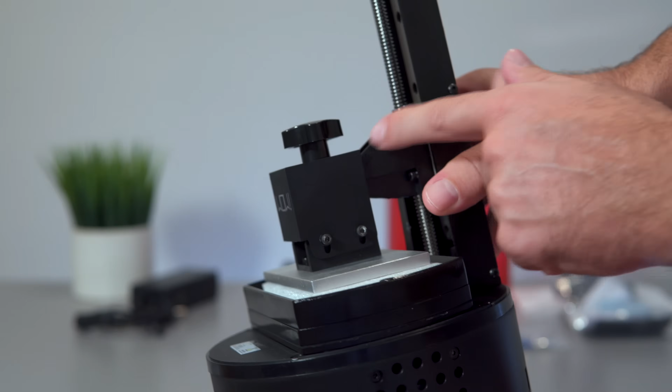So this is our printing bed here, and our Z-axis travels on a linear rail, and this is our Z-rod. All these parts here, though, are plastic, so for something this small, I don't think that really matters too much. And it looks like it says 'wow' on here with an exclamation mark.

So this is the back, with a sticker with some more information. This is where our power cord will plug in. There's a fan behind these little holes for ventilation, and another one on the other side. Here we have the knob that does all the functions, and the full-size SD card slot underneath that. This is what the bottom looks like.

Alright, so the interesting part about this printer is that it does not have an LCD screen, so there's no way to see or navigate any menus. It does have this knob here that pushes and also rotates, so maybe that has some kind of function. We're definitely going to want to go over the manual and figure out how to get this thing set up.

But I'm wondering if I unscrew this part, I should be able to slide out the printing platform, and there it goes. This is a solid aluminum piece here, and we had a little foam here protecting the bottom, which is the tub that holds the resin in. And all this is metal, by the way, guys.

And it looks like you can unscrew the tub and remove it and clean it and whatever else you got to do. I don't know if you guys can see, but it does say 3M right there. Alright, so now we just got to figure out how to get this thing started.

Looking at this resin, it seems to be a different kind of formula because it is water washable. This resin is actually water soluble, so you don't have to use alcohol at all, which eliminates a lot of the smells and stuff. That's quite interesting, definitely excited to try that out.

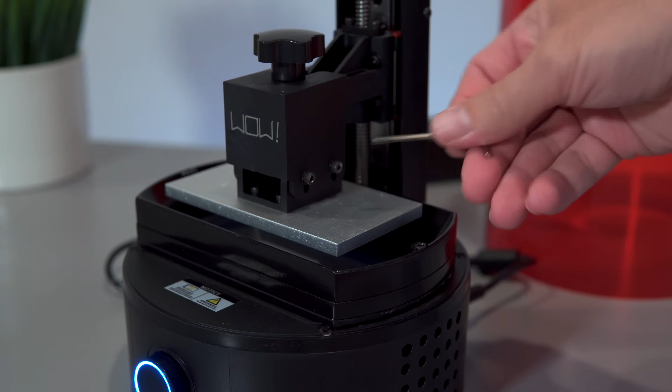The first thing you want to do is adjust this bed to be flat to the bottom here where the screen is. So we're going to put the build plate back onto the frame and tighten it up nice and tight. On each side there are 4 bolts that we need to loosen, which releases the bottom plate so it can move around. As you can see, the bottom plate can fluctuate quite a bit up and down. The whole point of this is to get it really flat to the bottom.

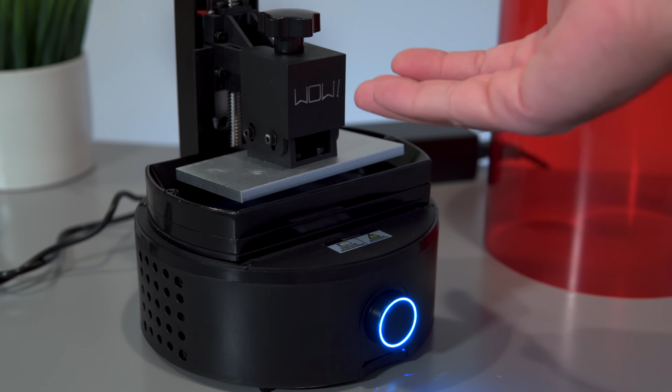The way you move the Z-axis up and down is you just rotate this knob. If you rotate it one way, it goes up, and the other way, it goes down. So now we're just going to slowly move down. All right, so we are on the bottom now, if you guys can see that. Make sure you do go all the way down.

To get this thing really flat, what you're going to do is put 2 fingers like this, apply some pressure down, and as you're holding it down, you tighten these little hex bolts back up. That's going to give us a really flat, even surface on the bottom. So be gentle when you tighten everything up, it doesn't have to be crazy tight.

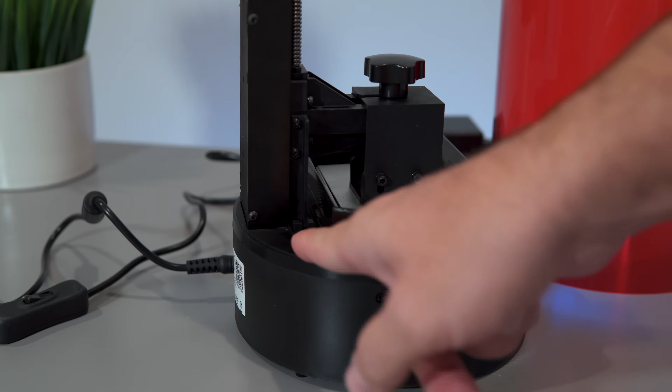If you guys notice, we can't go down anymore because it does have a sensor - kind of hard to see, but right here there's like a little optical style sensor that tells it to stop, and that's right at the bottom where it needs to be. Simple as that, we have our bed leveled now, or should I say our printing surface.

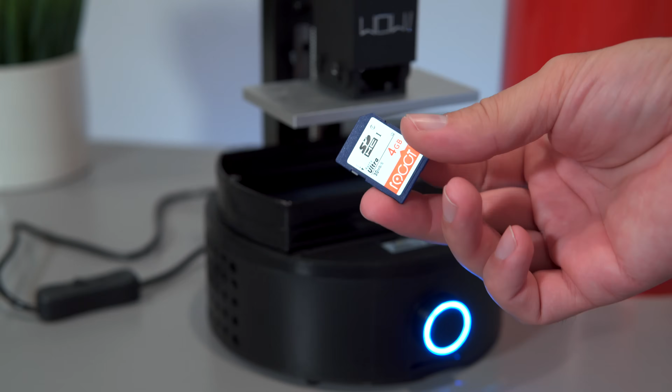So let's go ahead and go up. Now I did throw the SD card in the computer, and I think there's some test files in there that we can go ahead and print. Let's go ahead and give it a shot. That just goes on the very bottom here, upside down, and it clicks in. Our light actually turned off and turned green. I'm not sure what all these lightings mean, but I'm guessing green means maybe it's ready to go.

So let's go ahead and pour some resin in there. Now you definitely want to wear gloves when you're handling resin, and you want to make sure you have enough ventilation in the room so you don't choke yourself with these kind of chemicals. But this being water-based, I think it's not as dangerous as other ones. Let's go ahead and pour some in - we're going to pour about half of this tub in there. Look at that, we got this orangey tan color.

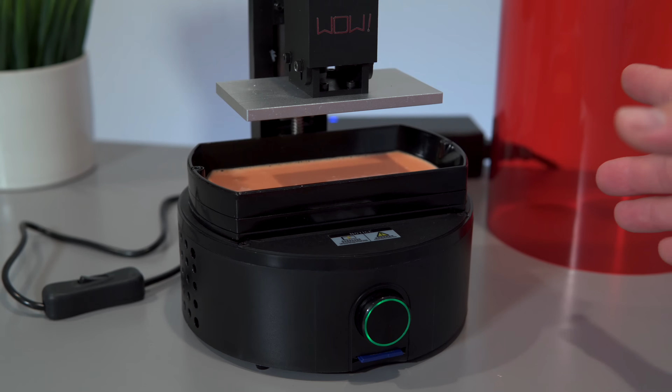There should be plenty. I haven't looked at the manual at all on how to use it, but I'm going with my intuition that if we just click this big button here, it should start. Let's try it - all right, so something started, and it's lowering down, so maybe we got something going here, guys. I can hear there's quite a decent amount of fan noise coming out of here. Let me see if I can get the microphone closer.

It's not super loud, it's just definitely noticeable. All right, so it's going into the resin now.

Oh, look at that. I hope we didn't put too much. All right, and it looks like our process has started. Or maybe not, it's coming back up. All right, so it's going back down now.

So it's going up and down some more, so I'm guessing it's doing something, and I was looking at the manual and the pulsing red means it is working. So I guess it did find a file and it is making something right now.

So I'm going to leave it alone for now, and we'll see if something comes out of it. But we got to put this cap on because we don't want UV light to mess with our resin in there.

All right, so I'm just gonna let it be, and we'll see what happens in a little while, and we'll see if something starts to show up in there.

All right, guys, so maybe you can see there we have some kind of model popping up. So it's been, I don't know how long, maybe about an hour, and it's working, and it's definitely making something. So yeah, it looks like everything's working out, and we'll see what this thing looks like when it's done.

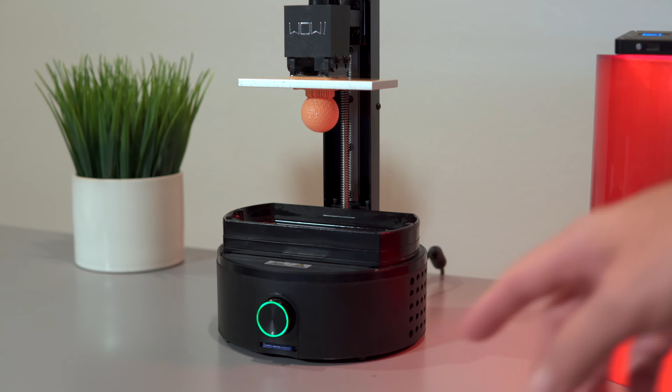So the print finished, and it looks like it is successful. So let's go ahead and take the cover off. And we can also see that we got the green light here pulsating, indicating that the printer is done. So I'm gonna go ahead and turn it off.

And let's go ahead and look at what we have here. So I'm gonna have to be really careful because there's a bunch of resin on the top of this build plate. So I'm just gonna go under and tilt it so we can drain some of it.

And so the cool thing about this resin is we should be able to wash it off in water instead of alcohol, which makes it really friendly. So our print looks like some kind of ball, and it is on supports.

So I went ahead and got a little container of water ready, and I'm just gonna set this whole thing in there. And theoretically this should just clean right off, and it is coming off actually quite easily because we can see all the little holes in the ball are starting to open up.

Wow, that's pretty awesome, and that works very well. Now I don't think we need to keep it in the water too much, but I don't think it matters either since the cured resin shouldn't dissolve technically.

All right, so we're gonna grab our provided spatula here and see if we can scrape this print off. Hopefully it'll come off easy. Okay, it's stuck on there quite well, but it does seem like it's coming.

Okay, so I just broke part of it. Okay, so it's coming off quite easy, but it's coming off in pieces. It's better that it sticks than it doesn't, so.

All right, well, this should not be harmful at all to the touch now because we're only touching cured resin. And you guys can see how the supports were laid here, and they're popping off really easy also. I think I am damaging the ball a little bit. Well, actually, maybe not. So that's what the support looks like.

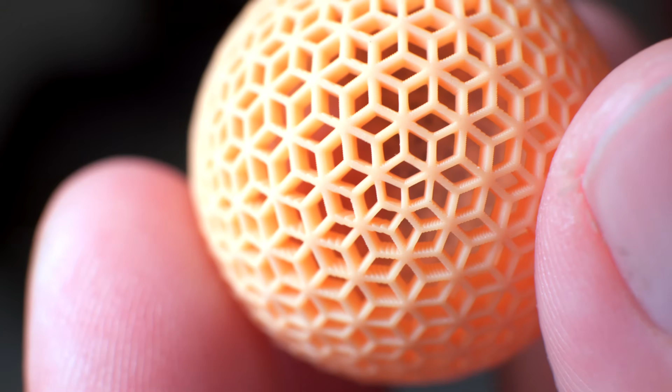Check out that printing, I mean that is phenomenal. You can kind of see how big my fingernail is for scale. I don't really know what to say except I'm impressed. You can see the layer lines right there, but with your naked eye you can't really see them, you really have to look for them. So hopefully this gives a better perspective of how good this print is. Even though this printer is on the budget side, we're still getting amazing print out of it.

So yeah guys, quite exciting stuff. I'm definitely excited what this printer can do now. I'm going to go ahead and wash all this stuff up, and it looks like it's pretty much already cleaned up, I just need to wipe it down.

I think the next thing we should do is grab this SD card, go to our computer, and install the software that comes with it so we can slice our own models and print them. Since I'm not going to use the printer for a little bit here, I don't want this resin just sitting in there, so I want to pour it back into the container.

Now you can pour this straight from the machine, but that would not be ideal because it'd be hard to clean up the whole tub area. So what you're going to do is unscrew these two bolts here.

Honestly, I wish they would have made some kind of quick knobs we can unscrew. I don't know why there's no knob, because either way this thing's going to have to come out. So then we're just going to grab our filter that was provided, and we're going to grab the whole tub, and we'll be able to pour the resin back into the container. You want to use a filter in case there's some kind of contamination, so it doesn't go back into the pure resin and mess up your print later on.

Maybe you can see what it looks like, there's just a clear plastic that the light shines through, and that's how it cures the resin. So when I get this pretty much all out, I'm just going to go to the sink and wash it off, since it washes off by water, and we'll be done.

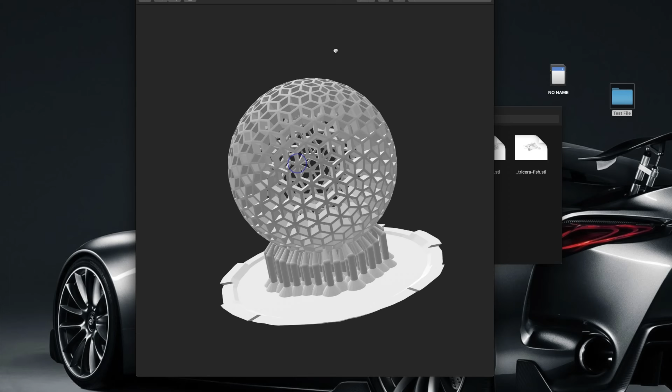We're going to print some of these here, kind of like this ring. That's pretty cool, we can try that. So back to the software, you can install Chitubox from here, or you can just go online and install it. It's up to you.

Here's the cool thing about Chitubox: they already have settings just for the Spark Maker. If you go over here by this big slice button, you can see settings. If you click on that, I have the Spark Maker FHD selected, and it automatically puts in all the parameters. You will need to go over here in the print area and fill these out correctly according to the PDF we saw in the print parameters of our resin. Depending on the kind of resin you're using, I filled this out on the 0.05 millimeter layer height. That's the only thing you really have to do, is kind of fine tune the resin to the slicer so it knows the best way to print.

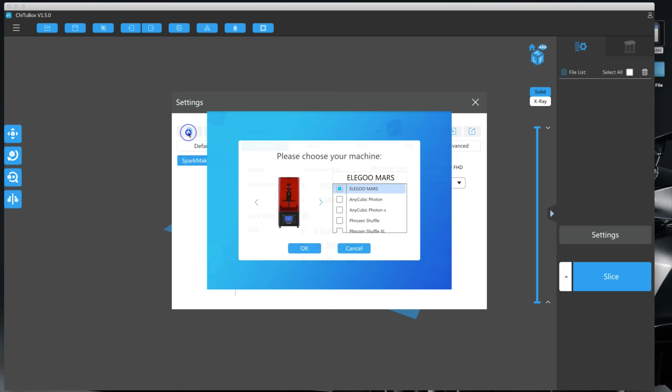The way you're going to find the Spark Makers is you click on this little add new printer button, and here it has all kinds of different printers you can choose from, and the Spark Maker right here is one of them. You do have FHD, or I guess the original. I think most of the Spark Makers now are FHD, which is the higher resolution.

If we click on that, our little picture comes up here. I'm going to cancel it since I already have one, and it'll just show up here on the side, or you have a default here. If I go to default, it goes to what it starts with, but if I go to my profile, it goes to the Spark Maker. So yeah, it's as simple as that.

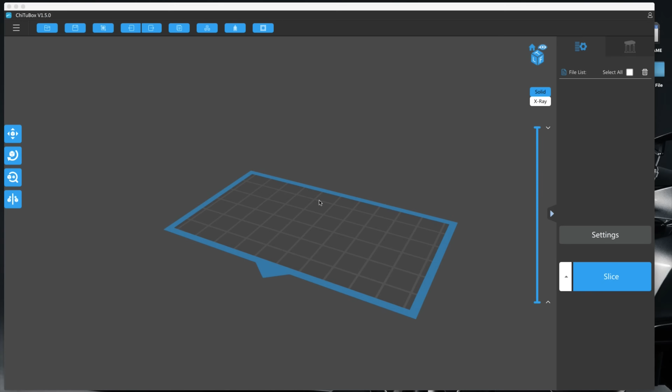After that, we're just going to drag in any model you want. The models they've provided are nice, easy and ready to go, but let's try to print something of our own, like this calibration cube. We're just going to drag the file in there, and it pops right up. Obviously you can move around, zoom in, zoom out, do what you got to do.

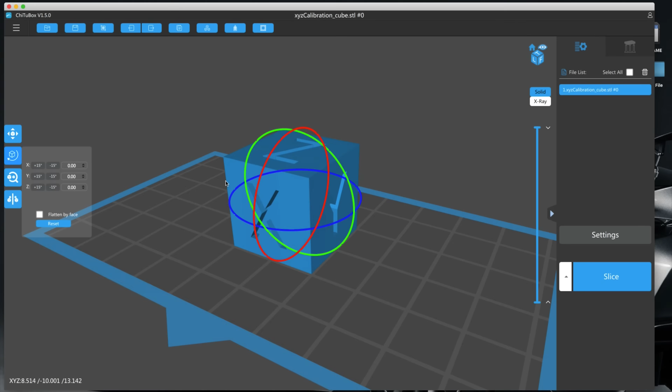Here's all your settings. This moves it on the axes. This twists it around if you want to twist it around. This is to scale it, bigger or smaller. And then here you can kind of mirror it and whatnot else. Pretty basic controls. On the top we got open file, save a file, apparently you can screen capture or record, undo, redo. You can clone the model, auto layout the model or models.

You can make the model hollow, which we definitely want to do, because if we print this solid, it's going to be quite a lot of resin. Then we can make a little hole for the resin to drain from. So if we go over here to the upper right portion.

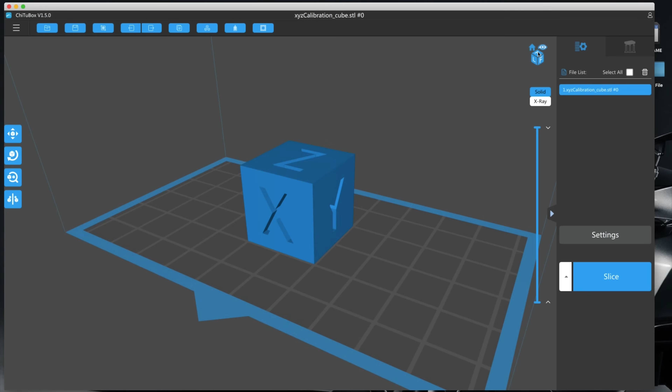Here we can see on the axes cubes are what we're looking at. So you have a home button here and it kind of just zooms out. Here we have a little, I guess, zoom button. And here we have top, left, and front. And there's an arrow here indicating which way's front.

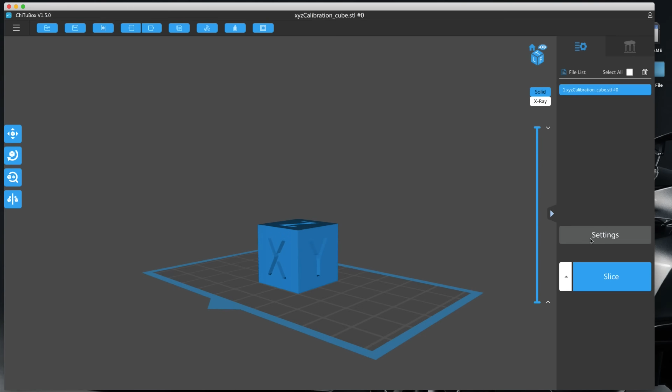So over here we have settings. So this is the file that we're using right now, which is this cube. We can click this delete here and it'll delete the cube. So we saw the settings and this is the slicer when we're ready to slice, which we're not yet.

So over here we have a tab, and here we have all the support settings for the model. Now I'm not too good at this, but usually automatic works for me. Here's all the settings you can set for top, middle, bottom, and raft. So I'm just gonna leave those where they are.

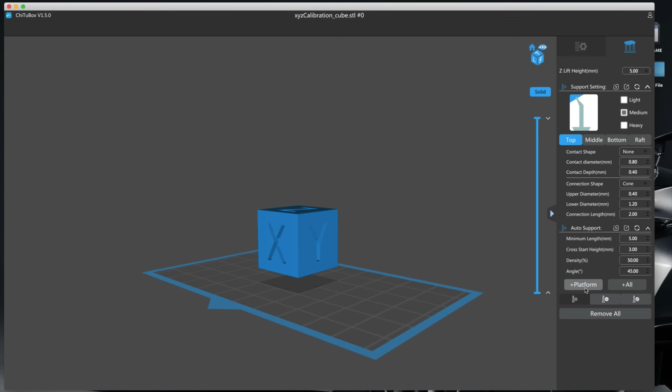And then we're gonna choose medium for the support type, which I think is default. So here you can kind of adjust everything if you play with it. So down here, if we click this button here, platform, we can see the supports automatically just appear and there's a little platform there. So in simple terms, that's pretty much how you do it. But if you play around with this, it's pretty intuitive and it makes sense.

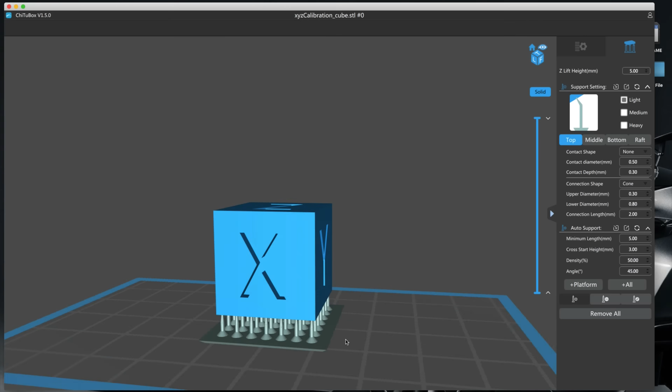So let's go ahead and remove all the supports and then try light. And if we try light and do it again, we can see we get a lot more pieces, just smaller ones, connecting to the cube. So I'm not sure if this is better or not. I'm just gonna go ahead and stick with the medium. I'll remove them, put in the medium. And obviously you can play with all this in the settings here.

Now we have a little scroll here. If we scroll it, we can see exactly what's going on. So right now our cube is completely solid and we need to fix that problem.

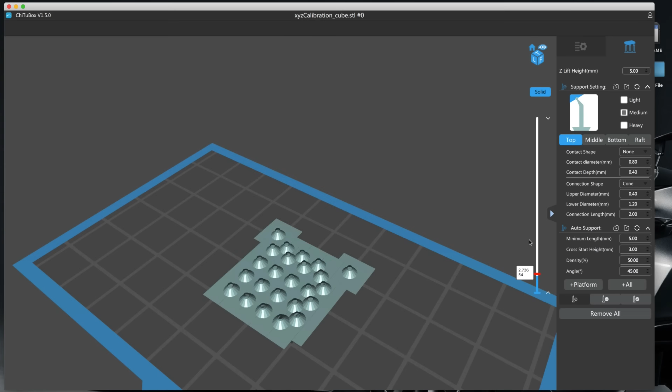So what we're gonna do is go back to this little gear thing here, and then go over here and click on hollow, and it's going to ask us the wall thickness, inner and outer. I'll push start and there it goes, it hollowed it out. So as you can see guys, it's completely hollow inside and there's only supports on the bottom.

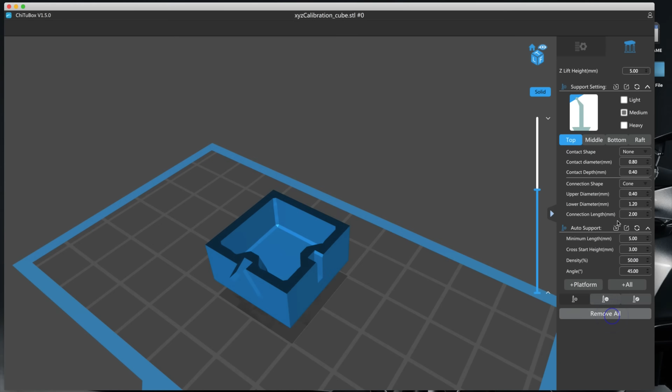Now if we go back to our supports, we can remove all the supports, and then if we click on platform again, you can see how we all of a sudden have supports inside of it. So you probably want to hollow it out first and then do the supports, because now we have little trees inside for the support of the top layer.

Now we also have another issue. If we're going to print like this, potentially we could have resin inside the cube, and that's not a good thing because it's not going to cure, plus it's going to warp the cube.

And so since our top here is actually the bottom, what we want to do is use this option called dig a hole, basically. It's going to make a hole and it's actually going to keep the little cap if you select this part. And you can choose the kind of hole you want. So let's just go with what it has here.

And so here we can add a hole anywhere on the cube, put a hole right here. So what it does is makes a hole and it throws the extra piece down here on the bed. So it's actually going to print that extra piece, so later you can cover it up. And so there you go.

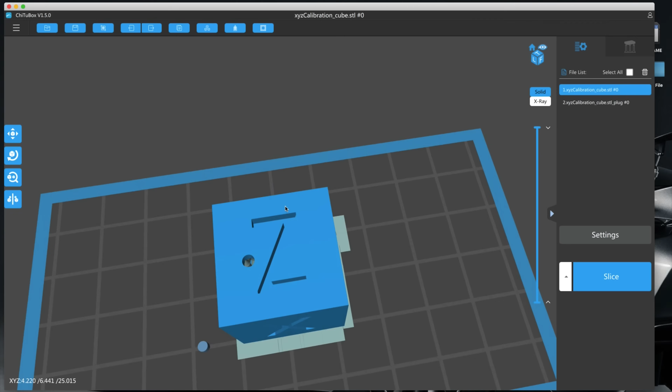So now we have our hole. And so now when this thing prints, if there's any resin inside, hopefully it'll leak out. And then we can just take this little plug and plug it back in. So I guess we'll experiment with this idea here. Because this is a box and it's completely sealed and we have air inside, there's a good possibility there'll be resin in there that might want to come out.

All right, so once you're happy with everything, what you're going to do is come over here and click on slice. And so now it's going to get sliced.

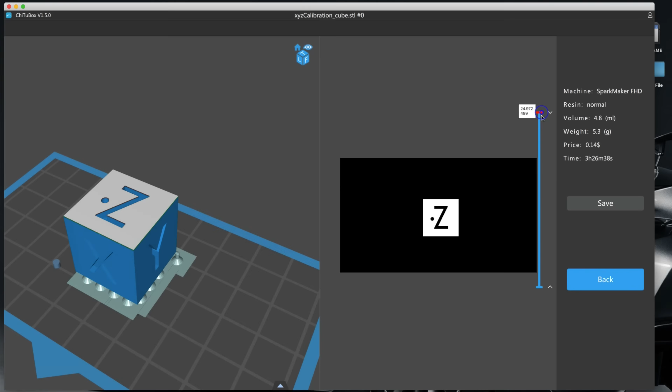And here we have a little preview, showing exactly how it's going to print. So if we go to the very bottom, this is what it's starting with. You can kind of see how it's going to be printing, so you can double check everything and make sure it looks good.

Over here we have some information about the volume, the weight, and the price, and how long it's going to take, most importantly, which is 3 hours and 26 minutes. That's quite long, but don't forget we are printing at quite a fine resolution.

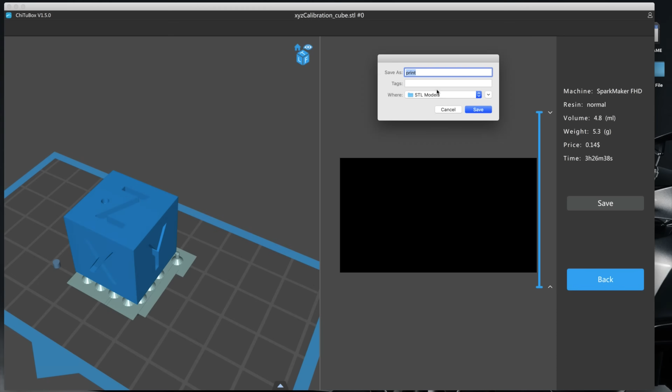So what we need to do after that is save the file. Because our printer only takes one file at a time, I'm not sure exactly what they need to be called, but I think if you just leave them called print like this, it'll work every time. Once you stick the SD card back into the printer, it'll know what it's looking at.

So let's go to desktop here and save it. Now it's going to write the file here. Okay, it says wrote successfully. Let's minimize this. This is the file that we have here, and it's called print.fhd.

So now all we got to do is throw this onto our SD card, and now we can go print it. Now if you have more than one file in here, you might want to make another folder and throw the files in there or delete them. I'm not sure exactly how the printer works with multiple files, I haven't really tried that, but if you just have the one file that you can see up front, then it always picks that and prints it. So now we're ready to print.

I'm just going to put this in the printer and we'll start printing our cube.

Alright guys, so we're back at the SparkMaker, and let's go ahead and put the SD card in. You can have the printer on while removing and installing the SD card. This will change because it'll read it and it turns to green. It's found files and it's ready to print.

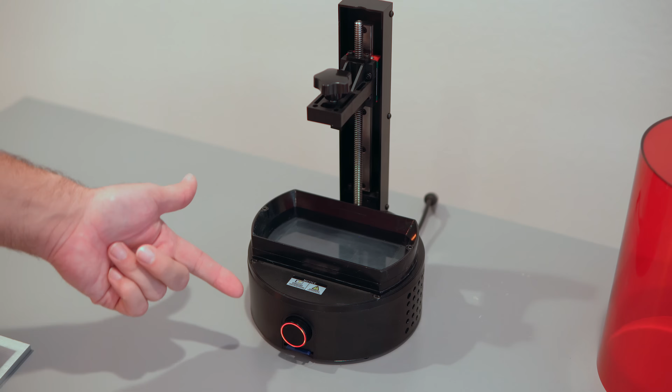So if I click on it once, it should find that file and turn red here. And now that it found it, it started printing. And that's pulsating - our Z-axis is going down right now.

Let's say you started your print and this thing is so low in there you can't even see. But if you pause it by clicking it once, it'll raise it up above the tub usually, I think. And then you can see if your model's stuck or not to the plate.

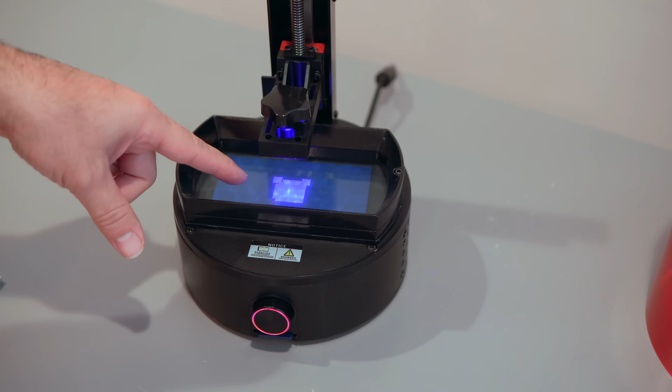Alright, so as you guys hopefully can see, our print has started. We can see our first layer of our cube, which is the platform part of it. So if I click this knob one time, it's going to pause and bring it up. Let's go ahead and do that.

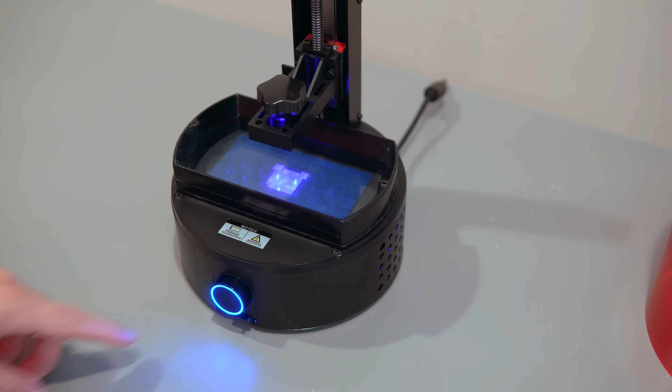And you can see it turned blue. Now it's going to finish the layer before it goes up. So if it's in the middle of doing something, you got to wait for it. Alright, so it's finished with this first layer.

Now it's going to go up quite high, and we'll see on the first layer if this will be higher than the bath here, so you can see it or not. Alright, and so it stopped right there. And if we put our plate in - you guys can't see, but it's about 5 millimeters above the tub, so you can see the bottom of the plate.

So that would be one of the ways that you can check your print while it's printing, if you wanted to make sure it's stuck to the bed plate here. So to resume the print, all you got to do now is push the button again, just like that, and it's going to go back down and start printing.

So now it's going to work on its second layer. Wherever it left off is where it's going to go. But let's say you wanted to completely stop the print. What you would do then is hold the button for 3 seconds or more, maybe, I'm not sure, about 3. There we go.

And it turns green. So if you remember last time it turned blue, that was paused. Green means it's going back to the state where it's on standby, ready to print. When you stop your print, it actually doesn't go anywhere, because from now you can move it yourself.

And so those are some of the basic functions that this knob has. So since we're ready to print, I'm going to go ahead and put some resin in there.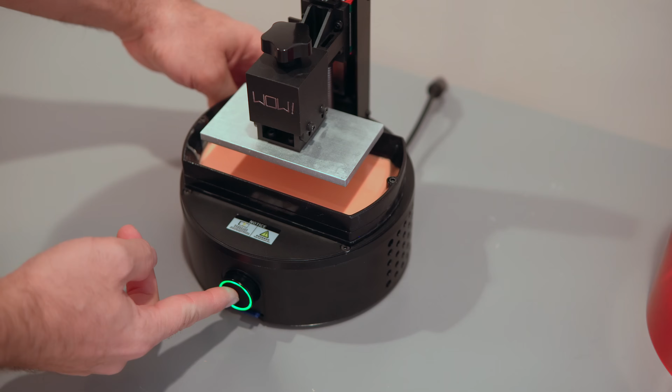And we'll start the print by pushing the knob here just once, and it initiates it. Alright, so in about 3 hours this print will be done, and we'll check it out.

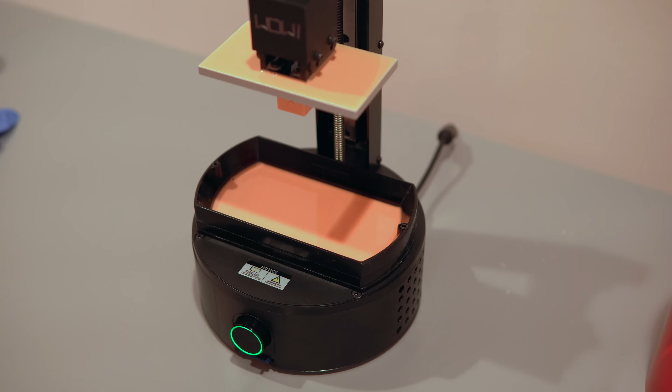So the cube is done. Let's see what it turned out like. Now I'm going to go ahead and put in a glove before too many people get upset at me.

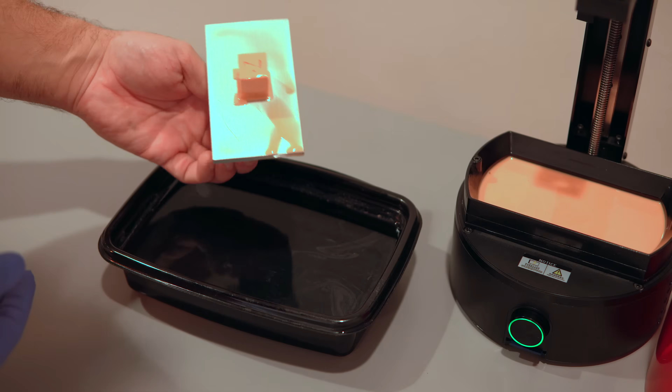So we're going to drain this by angling it. And I do have a bath of water here ready. We can see our cube is on there, but unfortunately, I don't think we got our little plug printed. I guess that got lost or didn't stick to the plate.

So let's go ahead and dunk it in there and clean it up. Just going to whirl it in there. This water-based resin is really friendly. Alright, so now I'm going to grab my little scraper tool, see if we can scrape this cube off.

Alright, there we go. So I'm going to wash it really good in there, get all the resin out. I rinsed it up and kind of wiped it, and I could definitely tell that the resin hasn't cured all the way yet. It feels a little bit soft to the touch, so I think we need to let this thing cure really good.

But you guys can see that there's that little hole that we punched in there to release the resin from the top. And the little cap that was supposed to print looks like it didn't print or it got stuck inside the printer. So we're going to have to make sure we clean up the resin before we print another one. And it looks like our supports worked out pretty well. So I'm going to let this cube cure and I'll print a few other things and then we'll take a closer look at everything.

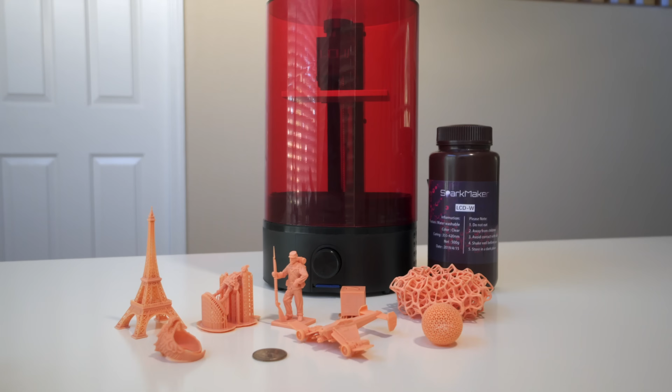Alright guys, so as you can see I printed quite a few things here, and honestly, I am very impressed with this resin printer. I was not expecting this level of quality. The prints that I got out of this SparkMaker are phenomenal. I haven't reviewed too many resin printers, but this one I think so far takes the cake, at least for me.

We're gonna grab the macro lens and we're gonna look at each item here close so you guys can really see how well the SparkMaker did here.

All right, so here's our first print that we did. A little quick look at it again. And that's the closest I can get. So I did print this huge donut thing, and looking at it up close, you guys can see that the level of quality on this thing is quite amazing.

Having a hard time knowing if it's in focus or not. So very complicated patterns like this can obviously be printed with a resin printer that you wouldn't be able to do with anything else. You guys can kind of see the marks there of where the supports were.

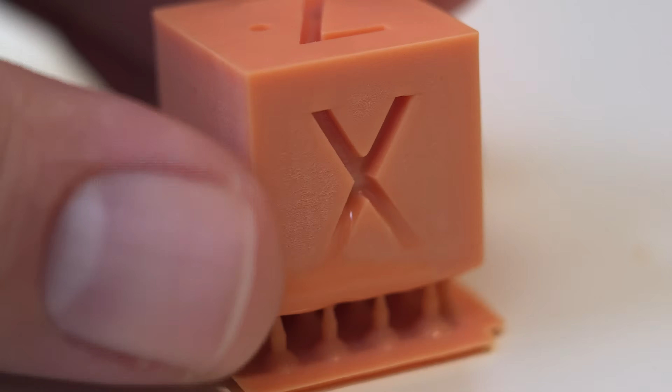So, alright, so I adjusted the camera away. I don't have to hold the model up. There'll be less shake like that. But here we can see the cube. It obviously turned out pretty good also.

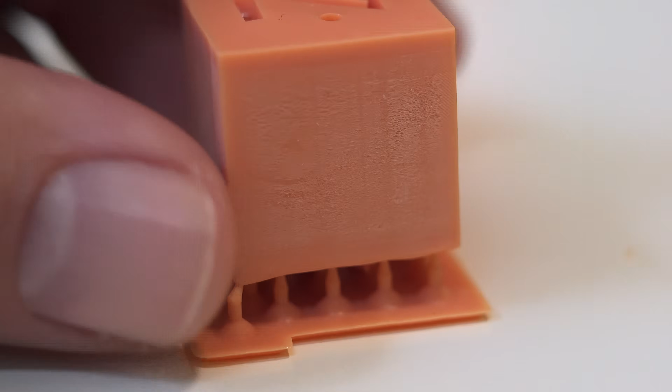Now the little marks that you see on it, it's probably me touching it while it was too soft still and making creases in it, things like that, like wiping it down. The best thing to do is obviously just to naturally let it cure in the sun. And you can see that punched hole that we did there. Now we did lose the cap unfortunately, but you can see how that could work out pretty well. If we had the little cap, we put it back in there, you almost wouldn't notice that there was a hole there. And I didn't take it off the support so you guys can kind of see.

And the bottom is definitely droopy looking. The reason for that, I think, is because the resin hasn't all came out of it. So overall, I was quite impressed with this print. Thought it turned out really good.

So this was our first slice in Chitubox, and it turned out okay.

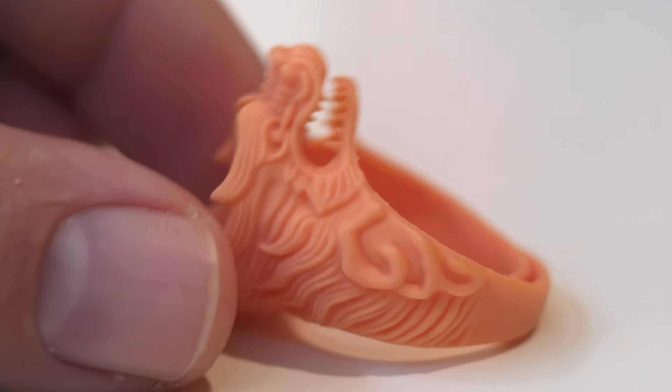The next thing I want to show you is this ring. This came as one of the files with the printer, and it turned out phenomenal. Look at the details on the mouth and the eyes, it's quite amazing. This ring does fit my finger, mostly my middle finger. Let's see if I can put it on and show you guys. It's really hard to see this close up, but the detail is just phenomenal. I'm very impressed with this printer. I don't really know how much better you can get after this, because just looking at it with your eye, there's no way you can see any layer lines.

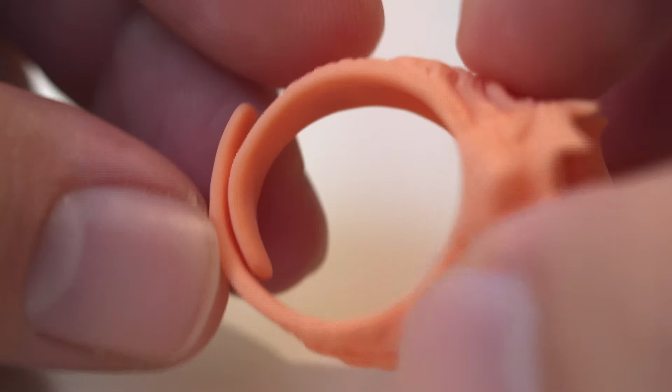Even if you look at the teeth, that's pretty small, tiny little details there that are very high quality. So an excellent print with this ring, and it obviously flexes so you can fit your finger. It's about a size 9 to 10. So yeah, this is the ring.

Very nice. All right, for the next print, I got the soldier figurine here, and he turned out very well also. That's excellent detail, guys. Throw my finger in here so you can see how little that is, so you can see my fingernail there. That's the soldier, very good quality. We can see his hand there, the little gun that he's holding.

There's a pretty sharp tip at the end of it. You can see his shoes, his pants, the gun, his backpack. He did print laying down like this. There were some supports here that needed to pop off, and that's what those little dots are all over the back. So it's a little bit flexible. You can see here I'm flexing his gun so it doesn't break off completely. Maybe it's just still curing, but in any case.

All right, for the next item, I wanted to print something a little more interesting. This is where I printed this airplane bomber thing, and it turned out very well also. You can see all the details. The roughness behind the wings is where all the supports connected, or most of them. If you guys can see the detail on this thing, it's phenomenal.

Let's see if I can get closer to this gun here. Look at that, that's amazing. And the engines here, pretty phenomenal detail. The thing that blew me away about this print is at the end of the wing here, you can see there's like a little wire, there's a gap between it, so there's a little wire that connects to something there. And it printed it with no issues, looks like. Same thing on the other side of the wing, you can see that little wire. It's pretty amazing, the detail is just phenomenal. So yeah, this was a great print here.

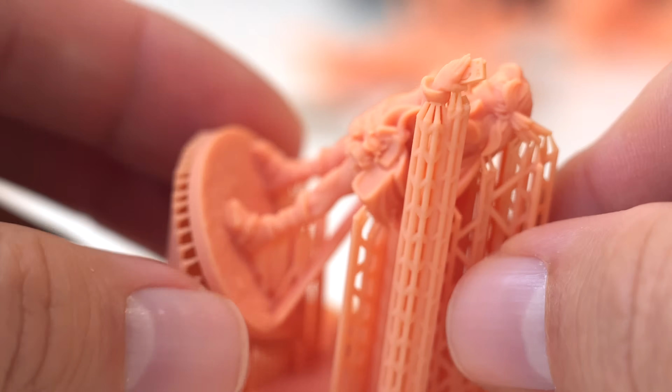All right, this next print really shocked me, and the reason was how small it is and what kind of detail we still get out of it. I did not actually remove the supports from it yet, I left them on because I was afraid I might break something because it's tiny. Look at my finger and look at the details. I guess it's like this girl holding a cell phone while also holding a sword in the other hand. It's kind of interesting, and this was one of the files included with the printer. If you guys can tell the detail of her shoes there, or whatever those are, and then her body and the face, I don't know how much better it can get than that.

That's pretty amazing, I cannot see any kind of layer line at all. And keep in mind, guys, this was all printed at the 0.05 layer height, so this is not even the most extreme layer height. There's a pretty cool sword in the back there. Just to show you how small this is, I also have a quarter here, and you can see how big that quarter is compared to this print. A quarter is a pretty decent size, but having prints that tiny is quite amazing. So this printer can do these miniatures flawlessly.

All right guys, the last thing I printed was this Eiffel Tower, and I can't fit it all in here in this macro lens, I can't zoom out enough. In any case, we can look at it up close, and this thing is tiny, guys. Look at my fingers and look at the Eiffel Tower, it's absolutely tiny. But the level of detail that is there is just phenomenal. Look at all those braces in the tower.

You can see through all of them, perfectly, and every brace is there. This is a really complicated print technically because of all the braces, but because of the way resin printing is, it's not hard for it to do it. For an FDM printer, this would be impossible at this scale, but even at larger scales, it still has issues because of all the retractions and whatnot else. That's a really beautiful print.

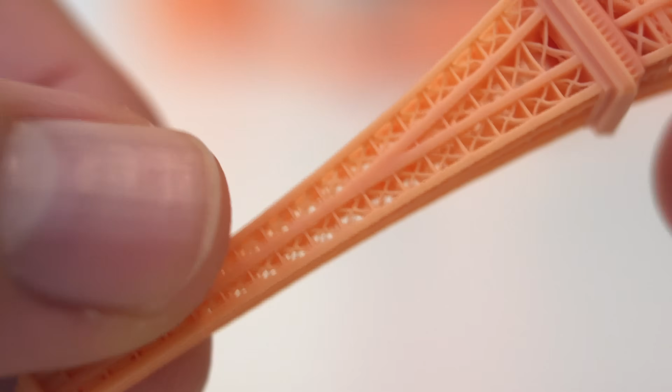So I'm going to flip this thing around so we can see the top portion of it. This is the bottom here, and we're going up as it gets thinner. The thing I want you guys to notice is look at the light that passes through it. As the tower goes up, it gets thinner and thinner, so thin, but we still have light that passes through. We're completely open still with that kind of fine detail. Even all the way up here, you can see those really tiny structures, little holes. It's even clear through there.

And then we get really macro up here and have some really fine detail. I'm going to try to pan it slowly, hopefully it'll work. There we go, maybe that's working. I don't know if I'm too close to it or not. Pretty awesome, I guess I didn't have it set right where the light goes through it. Let's do that again. You can see all that light that goes past it through all those braces.

So here are all the prints on the table, and you can kind of see them all together in their scales, and you can see how small that Eiffel Tower really is, which is why it's so impressive. In either case, you can see that resin printer definitely dominates the miniatures, and where there is very fine detail needed, there's just no way around it. Looks like SLA resin printing right now kind of dominates while still being of value.

And the SparkMaker being able to produce these kind of prints is just amazing. So if you've been wanting to get into resin printing, this is probably a pretty great way to start, especially because they have the water-based resin there. And as you can see, all of this was printed with that resin, and it looks phenomenal. I almost think that maybe this is the best way to go. I'm not sure about durability and how long it'll last and stuff like that. But as far as quality is concerned, the water-based resin that they have with their printer here works phenomenally well.